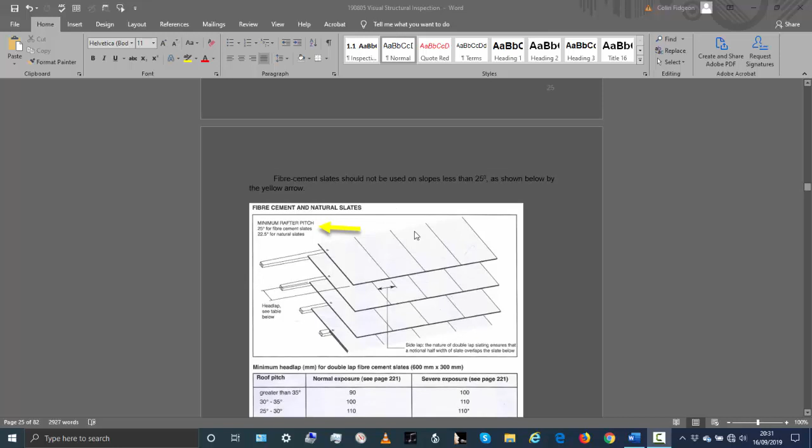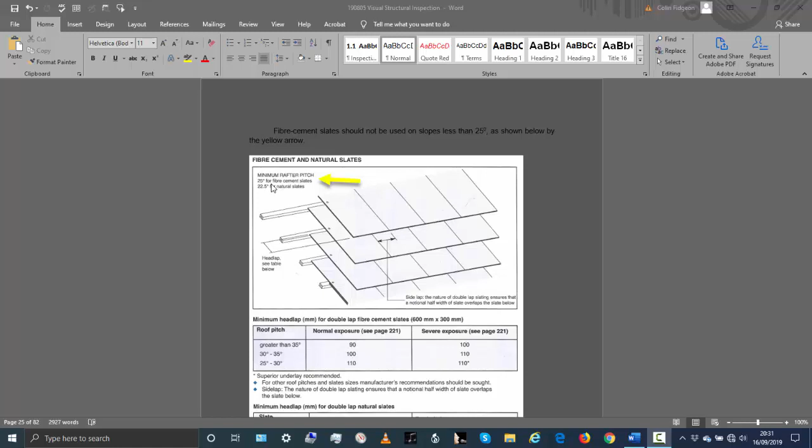I'm not sure why they decided to do it, but this is another photograph of the same flat roof area, and it's almost flat. There's a slight fall on it for drainage, but it's not enough. So this is just an extract from a document that I have talking about rafter pitches and lap lengths requirements, but it talks about the minimum rafter pitch for a fibre cement slate as being 25 degrees. So you can't go any flatter.

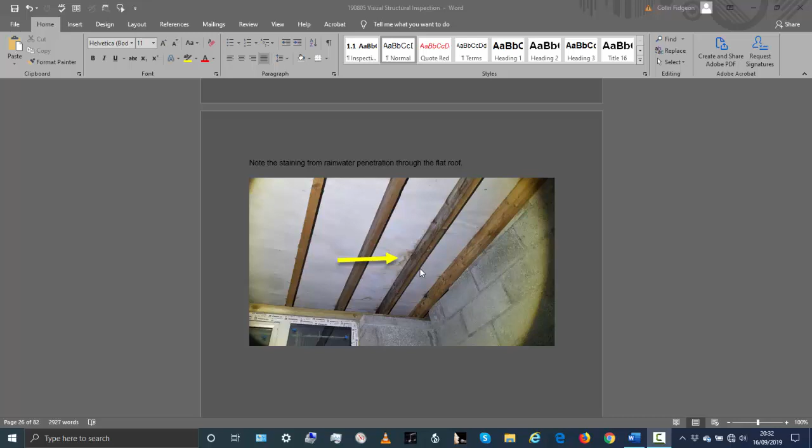So really the only way to resolve that is to replace that slated roof with some sort of a membrane, whether it be asphalt or something more suited or more typical for a flat roof construction, because rainwater will continue to come through. Even if it doesn't become a structural problem, you might just have staining on the ceiling that you're constantly painting out, and it's not the way.

Now the other problem with the flat roof is, now I discussed this briefly in video 1. This is a wall plate here. You see the timber, we call it a wall plate at the top here, but it's a timber runner. And basically that timber is used to connect all of the subsequent timbers, these timber joists up here.

And generally what you would do with a wall plate nowadays is you would strap it down. You put a galvanized strap that straps that down to the wall, and it goes down a few blocks and it mobilizes a few blocks, so that if there's ever wind uplift from stormy conditions, these straps hold the roof down. So the next page shows a typical detail of oftentimes how you might hold down.

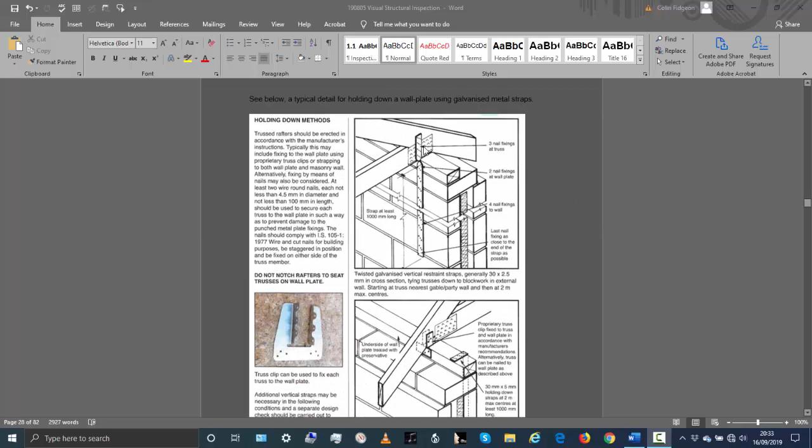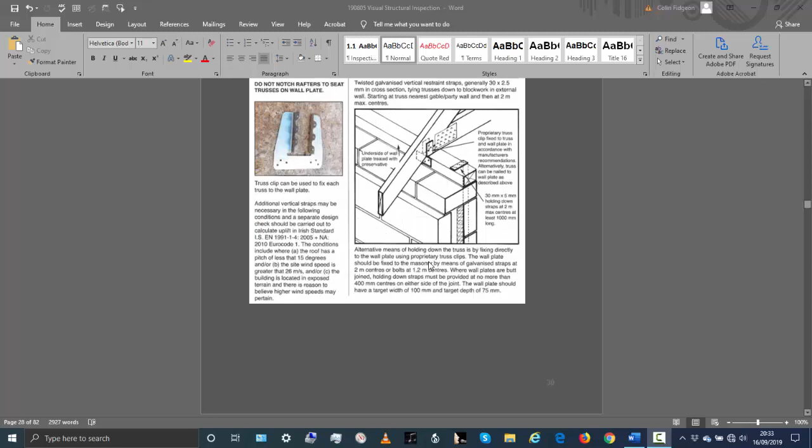So this is what I'm talking about here. You can see here, that's a wall plate, and you have this galvanized strap that comes over and goes down the wall. So it helps to hold this strap to the wall, and then it also allows the additional timbers to be nailed or fixed into this wall plate. So that's just typical details there for holding down methods.

Now what they've done in your particular house, in this dwelling here, is they've just sort of created a bed of mortar either side of the wall plate to hold it down, which is not sufficient. Now that was done back in the 1950s in the original dwelling. You can see where they've done a similar thing.

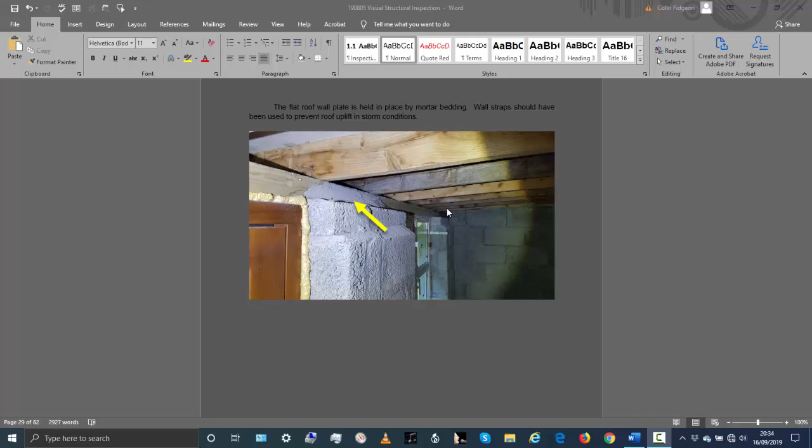They've actually bedded the wall plate in the wall, and it probably works in that location, but in this location it won't work too well, because there's large window openings and there isn't enough holding down this wall plate. So I would like to put in additional straps to hold down that wall plate.

Okay, so the next defect that I want to discuss is just at the rear of the property here. When I came on site, there was quite significant vegetation growth at the back of the property, so I had to clear it all away because I wanted to find the drainage and the septic tank and all the other.

Now I was just wondering why it had happened, but it was basically because, number one, the gutter was so damaged, it's not getting much sunlight because it was all covered in shrubbery, and as well as that, the drainage at the bottom was never finished, or there's no drainage put in here. The drains or the ground need to slope away from the dwelling so that the rainwater can get a path to get away, so that it's not ponding adjacent to the building.

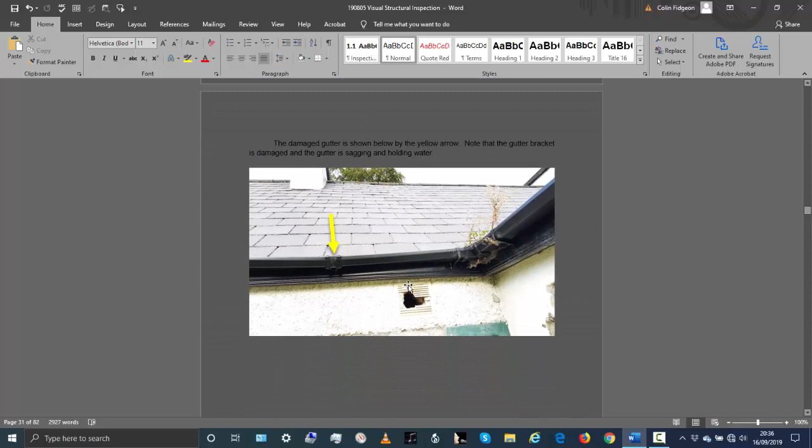So all of those problems with ponding water and with a damaged gutter had caused dampness in this area. And if we go on here, this is basically a photograph. That's the tree trunk there. There were kind of 3 separate tree trunks there, and they're removed now, so it'll hopefully slowly dry up, but it mightn't dry up too much because the gutter is still damaged and this ground area is still not graded

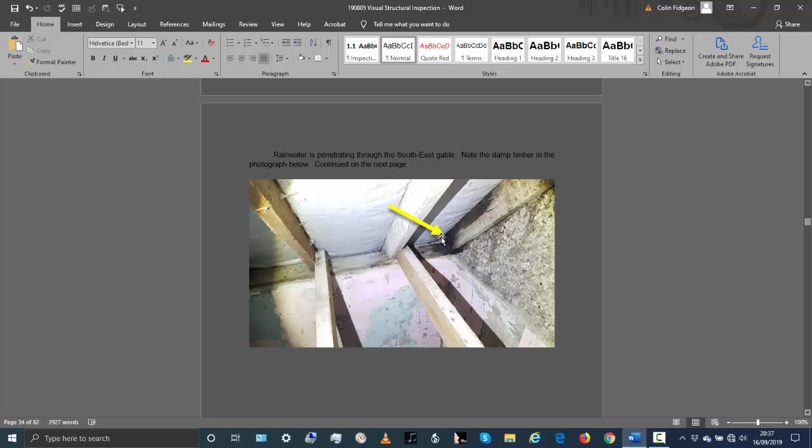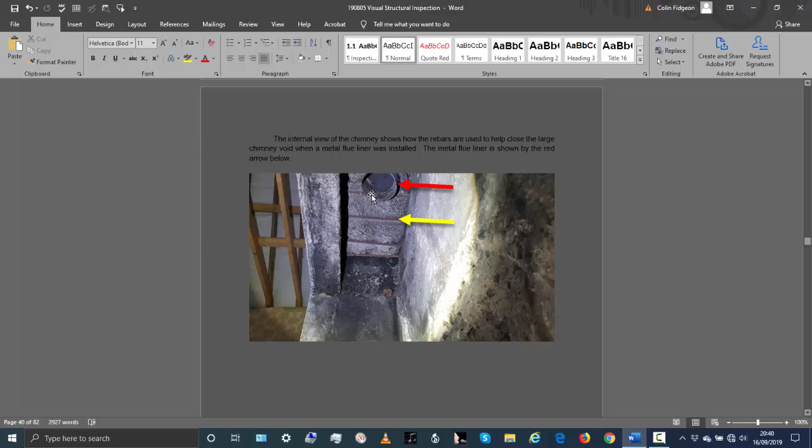There is some heavy staining on the outside from use of the fire, so that's why they wanted to use the flue liner. And these flue liners are not new. They were installed and have been in use, and you can see from the staining on them that they have been in use, but they're probably still in good condition and can be used, and they're okay.

Now, the other thing I was going to mention: you can see the staining here on the chimney. There's staining here, and that's basically from use of the fire. The soot is going to seep through and cause staining on the chimney. But the chimney is stable and it's in reasonable condition. Again, it's poured concrete, shuttered poured concrete on site. There were areas where it had deteriorated significantly and required repair, and they have repaired.

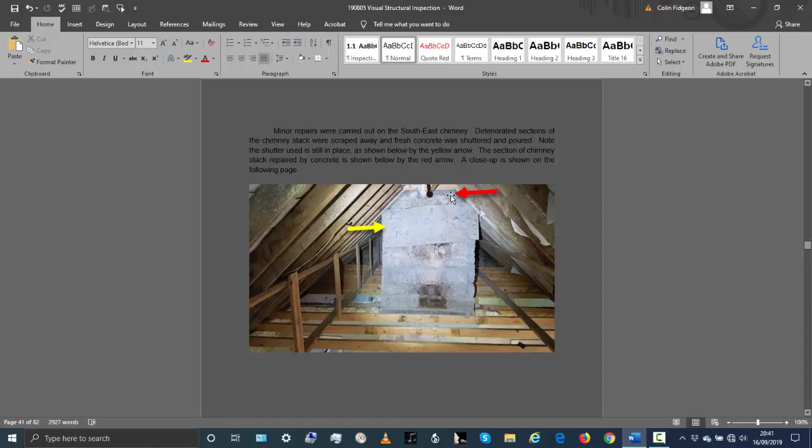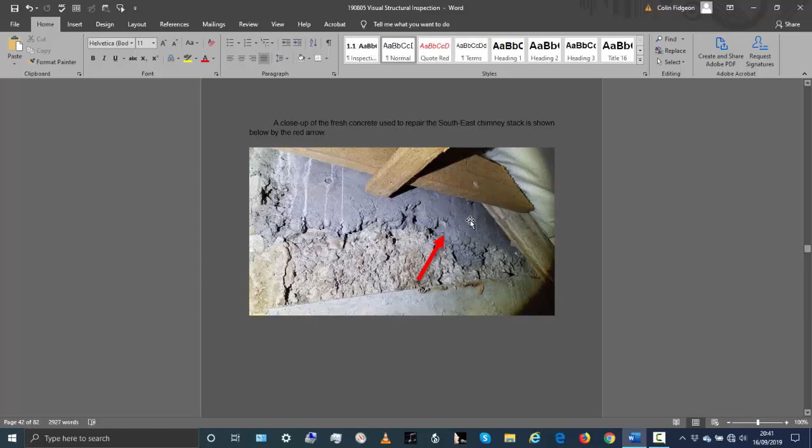This was the shutter that was used to repair. They would have scraped away some of the concrete that was deteriorated so much that it was possible to scrape away, and then they've repaired it with concrete. We'll see a close-up view on the next page. That's a close-up view of the area where they've repaired it with concrete, and that's quite normal to do it like that, just to do local repairs on very damaged areas, and it still looks good and sound and watertight from the

roof. The other side of this chimney stack, again, you can see the staining. Now that staining is from use of the fire, and basically soot and whatever else has seeped through and caused that staining. That's quite common to see, but it's not a major concern. It's still structurally sound. It's been lined with a flue liner now. Local repairs have been done. Again, you can see the fresh concrete at the top. Local repairs have been done at the top because there was probably too much deterioration, but otherwise it is in good condition and can be retained.

I'm going to stop this video here, and in the next video I'll talk about the northwest chimney.